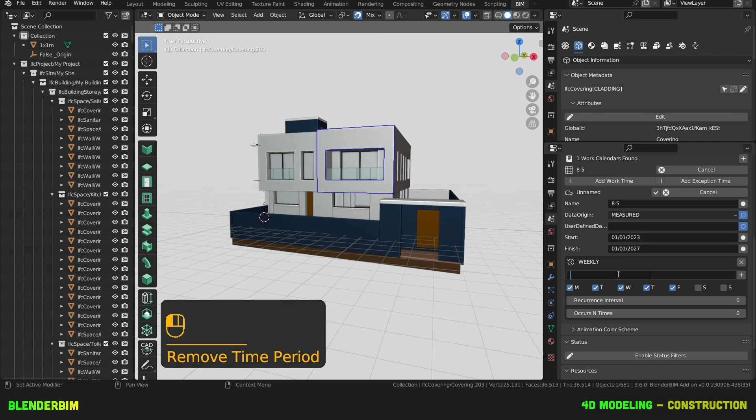And we'll add a weekly time of Monday, Tuesday, Wednesday, Thursday, Friday. And we'll be working from 8 a.m. to 12 p.m. Then from 1 p.m. to 17 p.m. See how you can do it with different formats? Let's apply this. Now I'll add an exception time for our holidays.

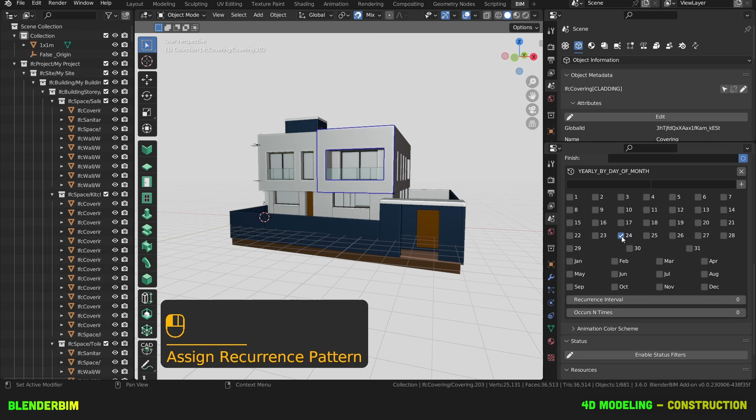So let's add a yearly unspecified date and we'll set it as the Christmas holidays. December. And this exception will run from the 1st of 2023 until the 1st of 2027.

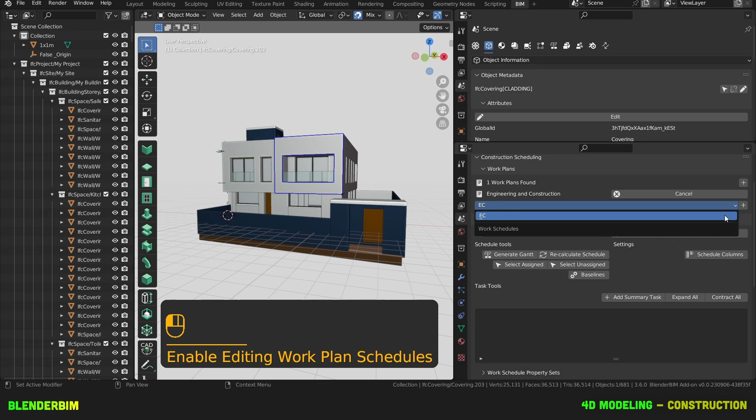Now, we can start adding a few tasks, so we'll click on Enable Editing Tasks. One thing we may also need to do is assign our work schedule to our work plan. We're going to add a summary task, call it Design, Construction, and Procurement. With this task selected, I'll press on Add here to add a subtask. I'll then name it Design.

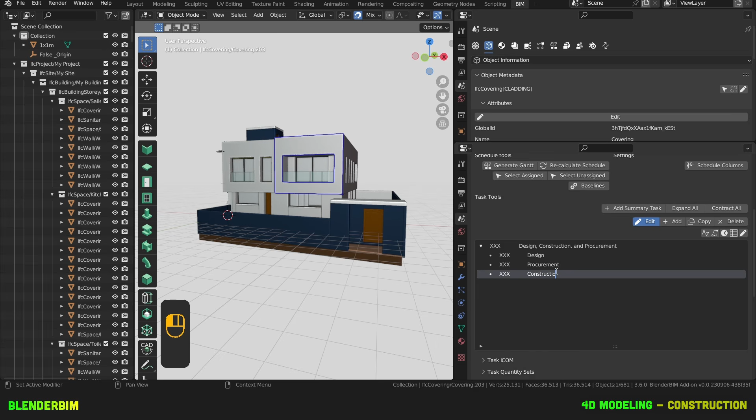I can carry on creating my work breakdown structure in Blender BIM, or just import a file through File, Import, and here you have different formats to choose from. Still with my summary task selected, I'll add tasks, procurement, and then construction. Okay, so I've created a basic work breakdown structure to describe the work packages to build this house.

Now, for each work package, I'd like to split this by building story. And I'm a bit lazy and I don't want to do this for every task, so I'm going to give you a little handy script. What we'll do is either go to the scripting environment or put your mouse in a corner right here, press Shift, and then drag your mouse and it'll create an extra panel.

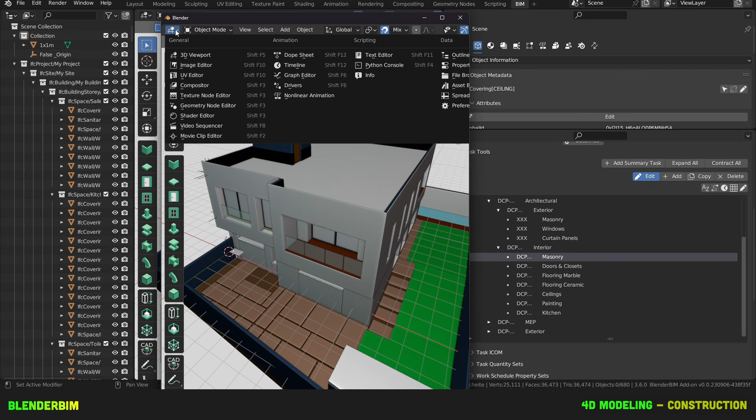Then on the top left, press on this little icon and change it to text editor. Then open the script I'm providing through either open here or just write it from scratch. Okay, so if you press on the pencil here, enable editing task attributes, you're going to get these checkboxes here. And if you select some of these, so let's say I'd like to split this by building stories.

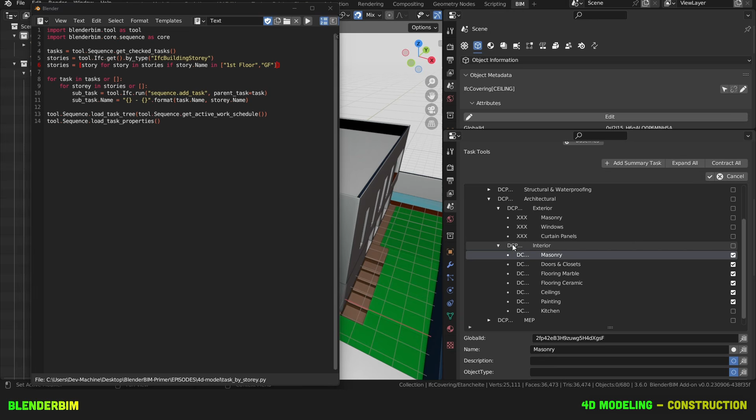What this script will do is it'll get all the checked tasks and then all the building stories, and then we'll filter them such that we can get the first floor and ground floor, and then we'll just split these tasks and we'll also assign them a name. So hit run. The next step is to create sequence relationships.

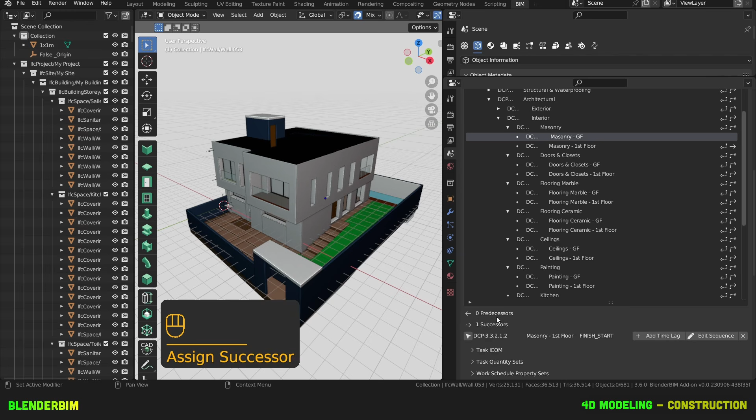For this, we'll press on this operator to enable editing the task sequence. For any active task, you can give it predecessors or successors. So we'll say that the first floor is its successor. Below here, you'll find the list of successors and predecessors. You can jump in between predecessors and successors. So after the first floor masonry, I'd like to do some MEP on the first floor.

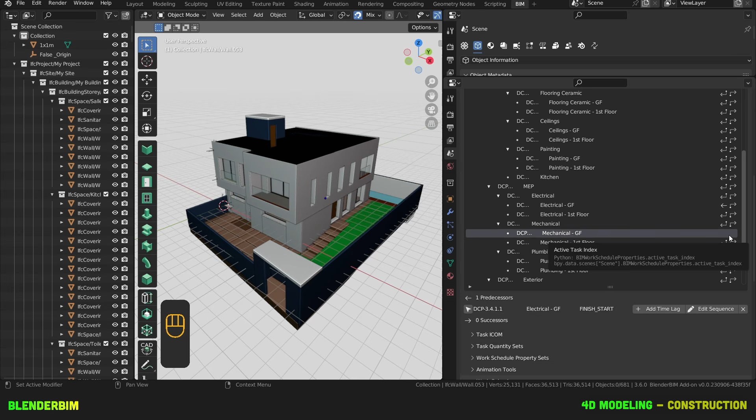And after the ground floor, I'll do my electrical ground floor. Now, once I'm done with electricity, I need to do some mechanical. When I'm doing my mechanical installation, I'd also like to do my plumbing, but this time we'll edit the sequence to be start to start. We'll also add a time lag of 1 day. You can edit the time lag, it can also be negative.

So once you're finished creating the relevant tasks and relationships, the next step is to add durations. For this, we're going to look at the schedule columns operator. We'll enable it and then click on set up default columns. You can also add the columns you wish to by pressing on plus here.

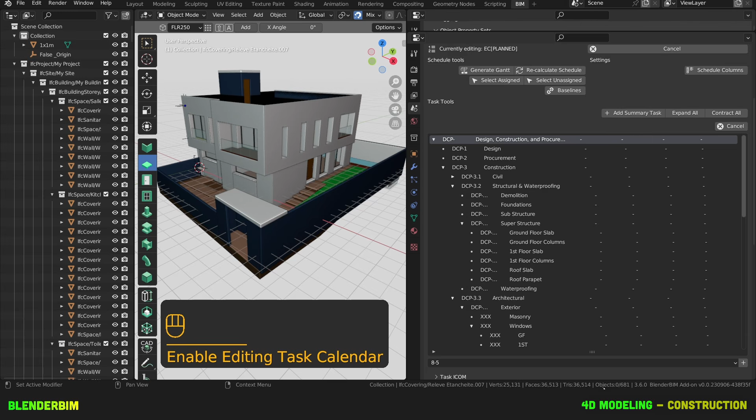And we'll take this opportunity to add a calendar to the first task. We'll press on this enable editing task calendar. And there it pops up. We only have one calendar, so we'll add it. We'll press on cancel and see how the other subtasks have all inherited this calendar.

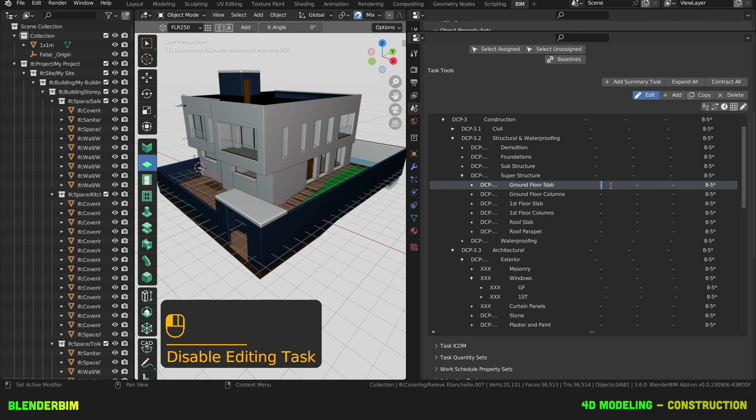Now, we need to look at the task that kicks off our project. I set it as this ground floor slab. It has no predecessors and we'll give it a date of the 2nd of January 2023. Then we'll give it a duration of 5 days. For the other tasks, we can now only give durations.

Keep on adding durations. So I got tired of adding these durations manually. So here's a little script that will add a duration for any task that has either a successor or a predecessor. So after you hit run, all your schedule will be populated.

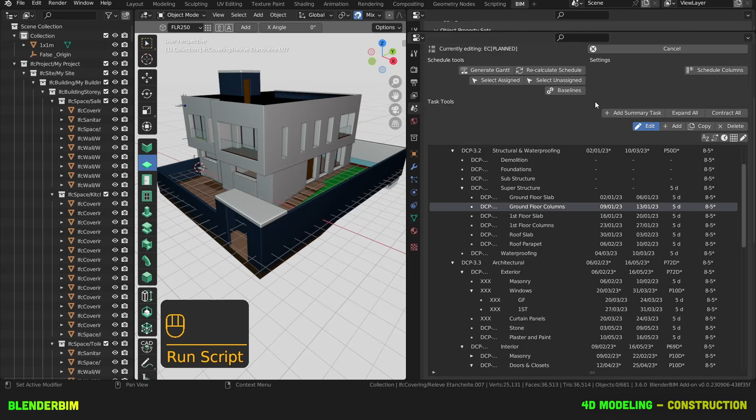Our next step is to assign building objects to our tasks. So for this, I've prepared my view to have two properties panels here. The bottom one will show my tasks and the top one will go to project overview, and under search here, we'll start adding search filters.

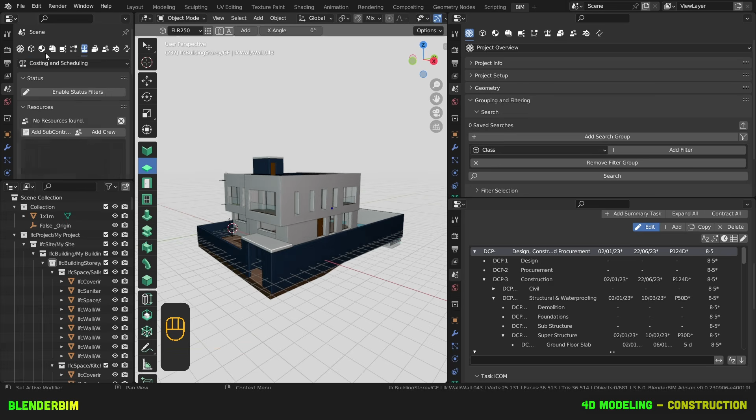We'll also put our mouse on the top left here and click and drag down. Then we'll turn the top one into a properties panel as well. With this top panel here, we'll be looking at object information and materials, etc. So we can easily add filters depending on the objects we have. So I'd like to add these ground floor walls and their masonry.

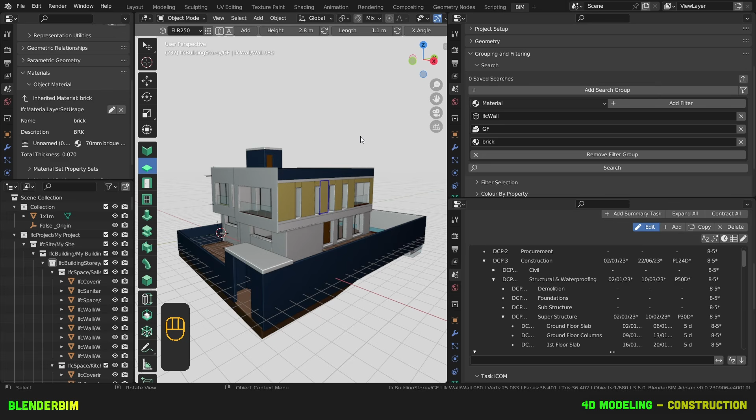So I'm going to add a class filter, and here I'll write IfcWall. I'm also going to add a location filter to only select my ground floor walls. Then I'll add a material filter. I need a material which has the name brick. So the layer set has the name brick, and we'll search for all of this. But first click on empty space, then click on search, and there we go. We have all these walls.

Now I want to assign them to a task. I can either find it here and click on it manually or look for it with this search tool. Here's my masonry ground floor. Make this a tad bit smaller. Then I'll add it as an output because that's what my process will output. I can carry on doing this exercise.

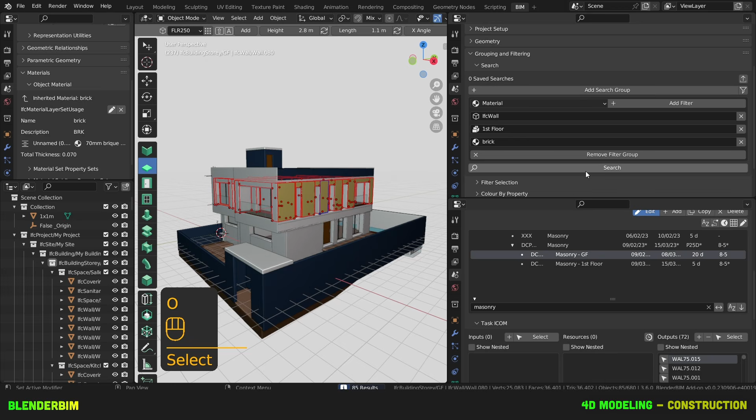Search. Okay. So this model is quite detailed. There is this waterproofing modeled as a covering. So I've added the horizontal waterproofing, and now I can add a second search group. When I hit search, I'm now selecting all of the correct waterproofing. I can then add it to my roof tasks, and there we go.

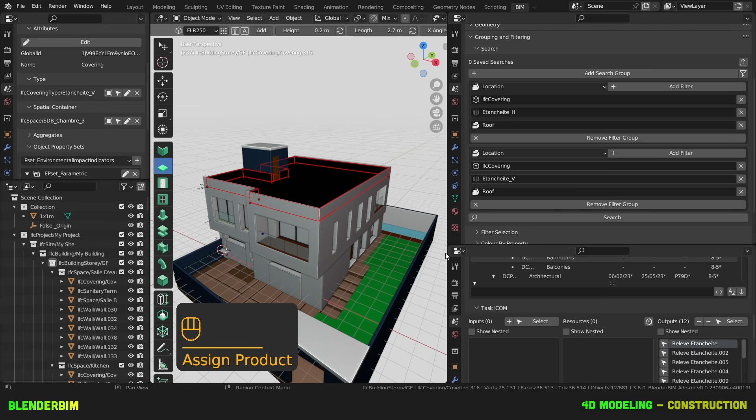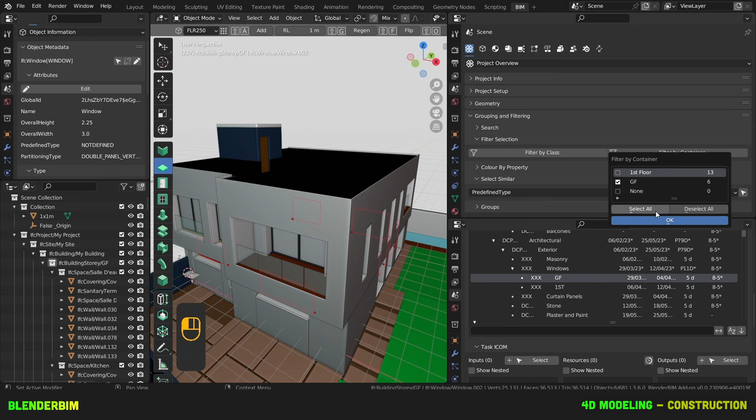So for my windows, I have a window selected, and I have this window activity selected as well for the ground floor. On the object metadata, I'll look for all my windows, and then on this same grouping and filtering panel, there's a filter selection. You can filter by container. And I'm only going to select my ground floor windows. Then I'll assign them. So carry on assigning building objects, and let's now move on to resources.

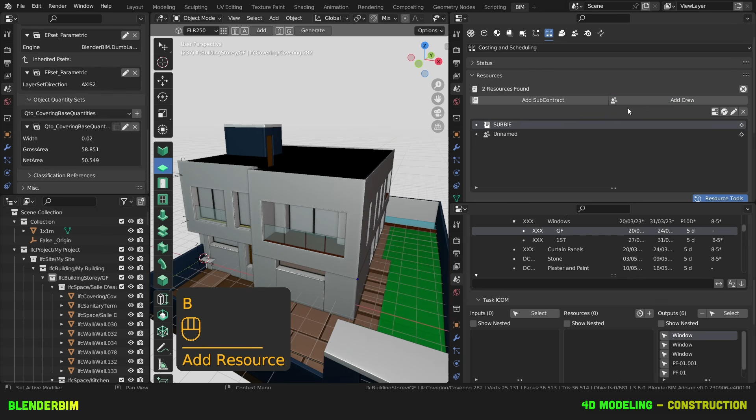Let's turn our top workspace area into costing and scheduling here and toggle the resources panel. Click on the pencil icon to load your resources, and then just add a subcontractor. We'll call this SUBBIE. We'll add a crew. We'll call it masonry. Then maybe I'll add a labor resource here. Call it hollow blocks 100 mil.

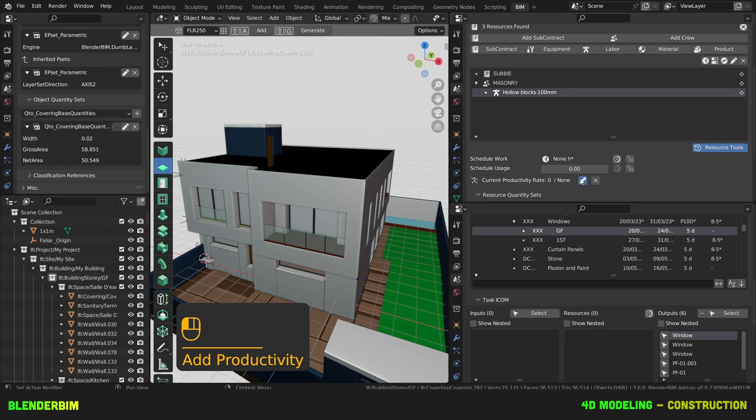For the moment, we'll just stop here and give this a productivity to demonstrate how this works. Then we'll import a CSV with a lot more detail. So let's press on plus to add productivity data and then press on this little pencil. Then you can add, let's say, 1 square meter, and the quantity name we'll need to take off is net side area for my base QTO for my walls. And let's just say it takes us 30 minutes per 1 square meter area.

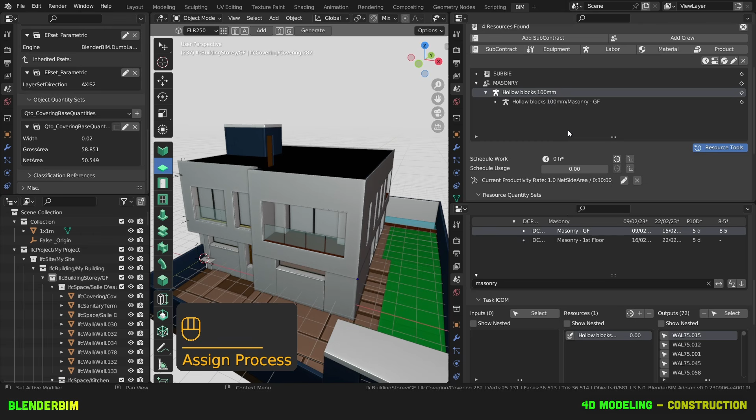Okay. Now, I can look for my masonry ground floor, select my task, and press on plus to add the resource. This will add it on our tree here. And when I select this resource, it tells me it has an inherited productivity rate. I can override it or just keep the parent to make my calculations.

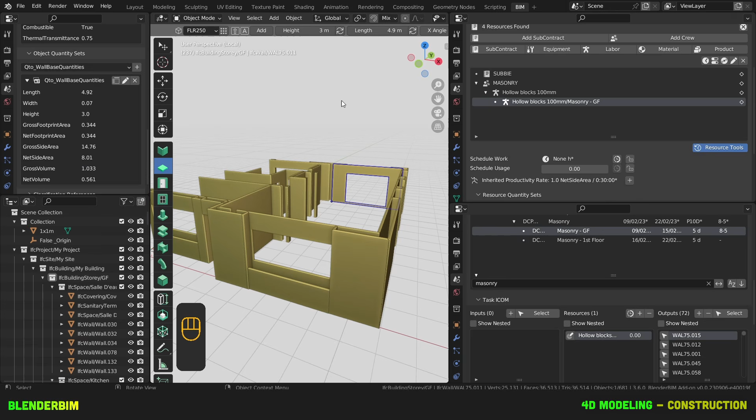And because this task will output all of these products here, and these products have the QTO wall base quantity of net side area, the one I'm taking off, well, I can now press on this calculate resource work, and it's going to tell me the man hours I need to execute this activity.

So let's say I want to constrain this. So I'm going to lock this, and now when I change my schedule usage, let's say to 8 resources, it's going to tell me how long this task is going to take. So let's say I only have 2 masons, it's going to take 7 days. We'll now disable editing the resources and we'll load a CSV. Okay, so here's a little template.

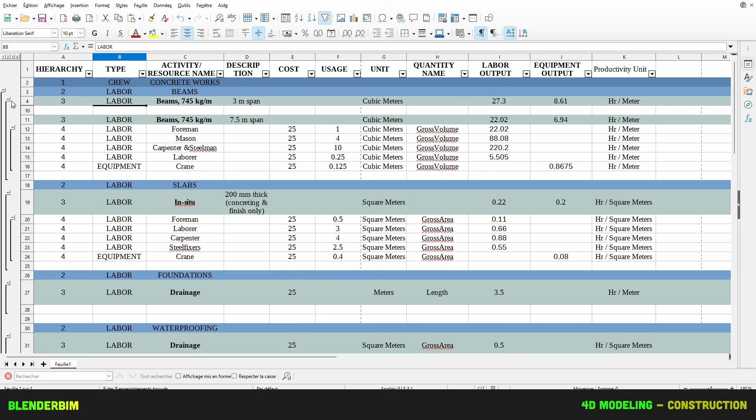I'm providing this under consult-bim.com. You can tweak this to your liking. We're going to look at masonry. So we'll create a crew and a laborer. Underneath it, there'll be a laborer and this team right here.

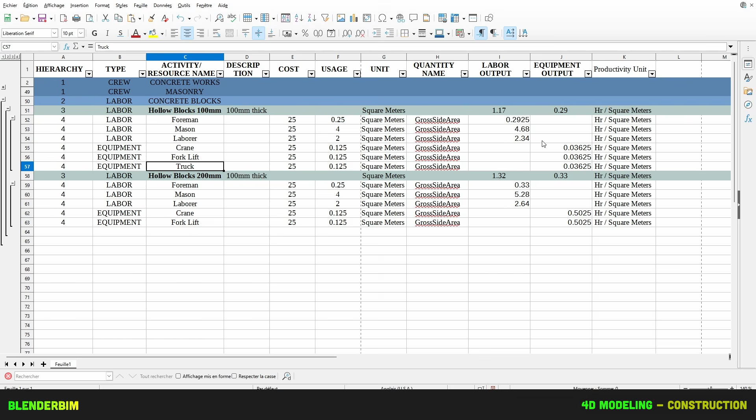So here we have the cost, which is per hour and not per day. With a typical team with this kind of usage, we need 1.17 hours to produce 1 square meter of hollow blocks. And in IFC, we need to take off the gross side area. So if you'd like to change these, you need to make sure it matches the quantity name you need to take off. Make sure to save this as CSV and then click on import resources and load your resource spreadsheet.

So I've deleted the old ones I have, and here I'm just going to look for masonry hollow block. Now I'm going to assign this resource here. So I'll press on plus. So I've assigned all of my resources to this activity. I can do the same for my first floor. So when I have the parent of these 2 resources selected, I can press on calculate resource work.

And so this will tell me the total man hours I need. For the ground floor, I need 85 man hours. And on the first floor, 100 man hours. So after you're done calculating all of your resource work, here's something really nice. When we constrain the resource work, and make sure you do it for all of them. So for all my ground floor, I'm going to lock this.

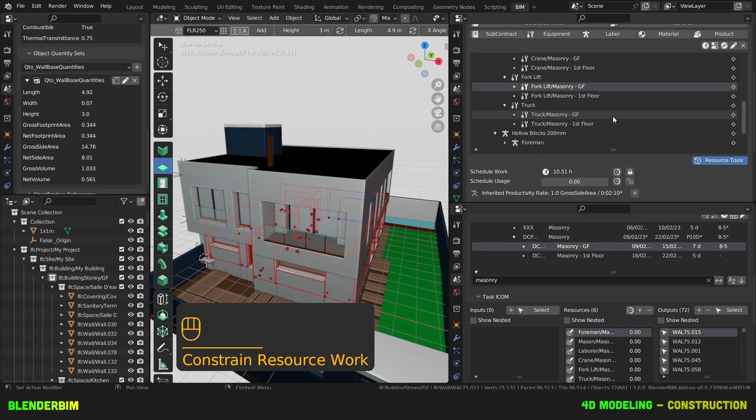So let's see how many resources I need for 7 days first. Okay. So I need a lot of masons, it seems. Quite a few laborers as well. Not so much of crane time. What I'll start doing now is maybe change the duration of my task and see how many resources that requires. So for a 5-day duration, I need 34 masons, 17 laborers.

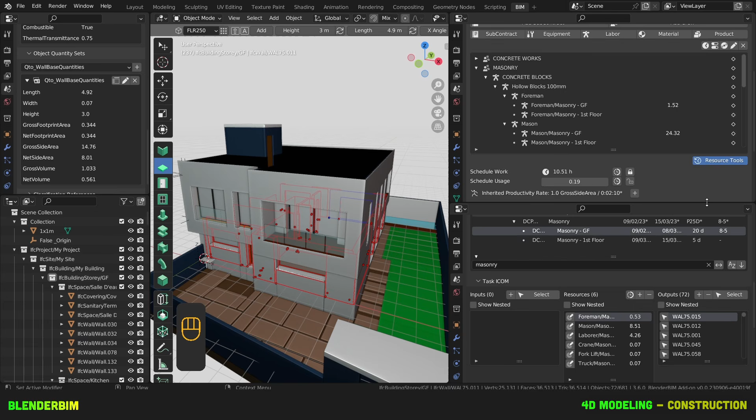Maybe this is too much and our site is going to be quite packed because this is quite small. It's a bit unrealistic, so probably this task should be something like 15 days. And we're starting to get something more reasonable here, perhaps even 20 days. Okay, so here's how we can go into quite some detail and link our resources to our tasks parametrically. And the last parametric link we need to demonstrate is with costing. So before we go into a lot of detail into costing, let's just see how this works.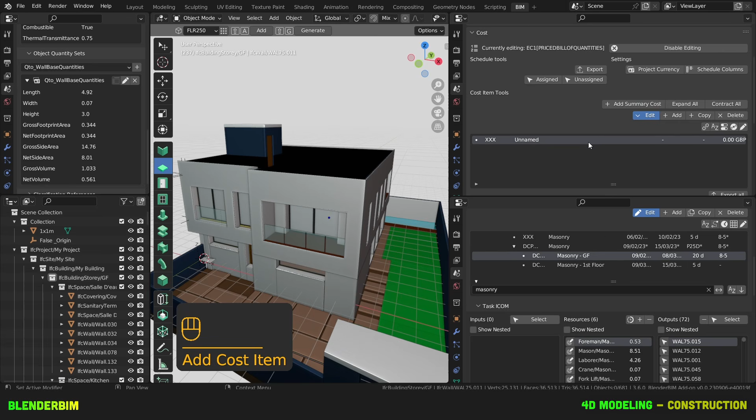So these resources had a cost, as we said. And so we can now go to our cost schedules panel. We'll add a cost schedule. We'll call it EC1, and this needs to be a priced bill of quantities. Then I'll press on this enable editing cost item, and I'll add a summary cost, and I'll just select this for the moment. And with my task selected down here, I can assign the task.

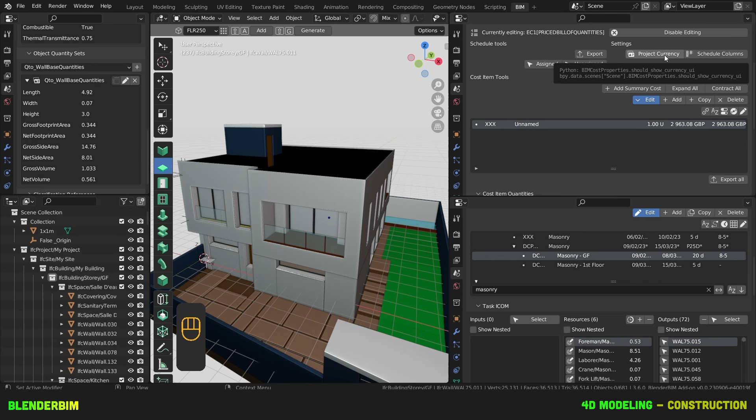And here I have this masonry ground floor activity, which has these resources and it's linked to all these products. So I can now just press on calculate cost item resource, and it tells me this task will require £2,900 because I have a project currency. In the next part, we're going to be delving into how to create construction animations with the schedule that we've created.

Okay, so at this point, it's good to save your IFC project and load it in a fresh Blender session. So far, everything we've done has been in native IFC, so we don't need to actually use the Blender file whilst we were working. But going forward, we may have to save some extra stuff in our Blender file. This may be for temporarily overriding materials, adding Blender context objects, linking Blender files together, etc.

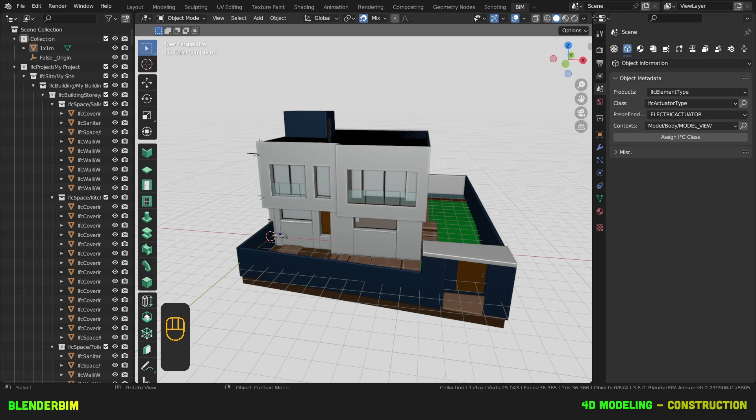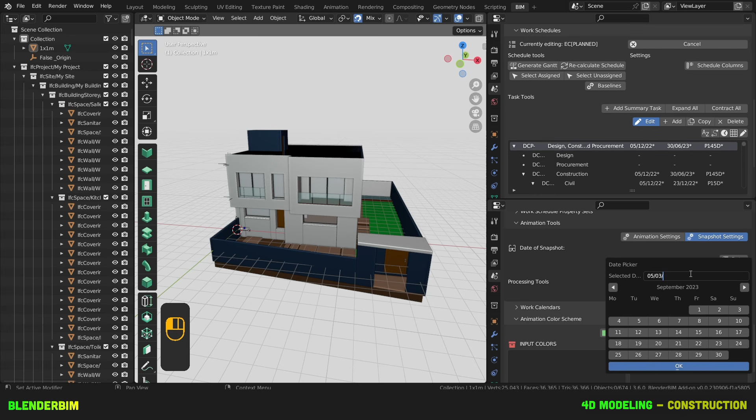Let's tweak our workspace again. We'll put our mouse in this corner here and click and drag. Then we'll go to costing and scheduling on both panels, and we'll enable editing our work schedule, and we'll look at animation tools here. So here with these animation tools, we have the option to look at a snapshot, so at a specific date. So let's say I want to look at something on the 5th of March 2023. I'll click on create snapshot. And this is the situation at that date.

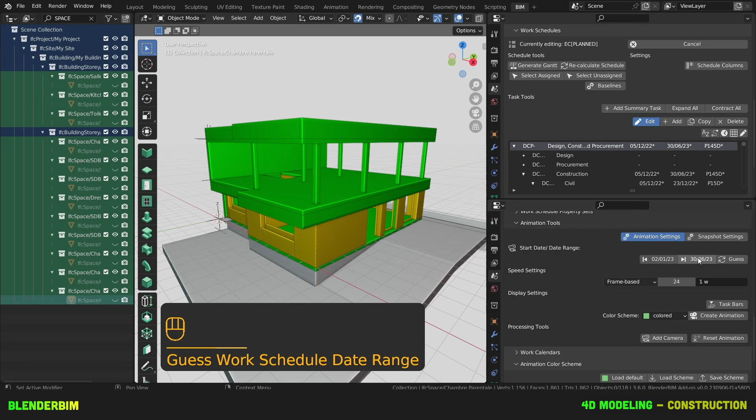Maybe I'd like to hide my spaces. So that's what the 5th of March looks like. And so to create a date range visualization, we're going to set some dates, so a start date and an end date. Pressing on the guess button, we'll look at all your tasks in your schedule, and we'll find tasks which have product assignments, and if they do, we'll try to derive the start and end dates of the visualization.

But you can tweak this to your liking as well to match the start of your project, which here it seems is the 5th of December. So then you can change your speed settings. So let's say we want a duration-based animation where 1 second in this animation represents 1 week in reality.

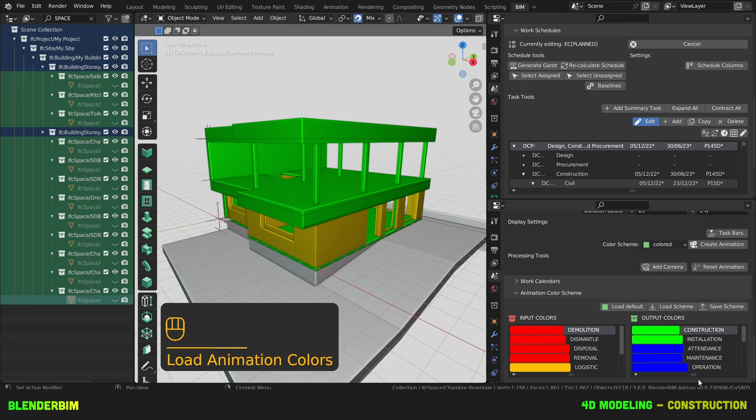So this is a fairly good rhythm, but you can tweak it to your liking. Let's say even 2 seconds. Then we can hit create animation. And if you'd like to tweak the appearance of the animation, you're going to have to load the animation color scheme and change these to your liking.

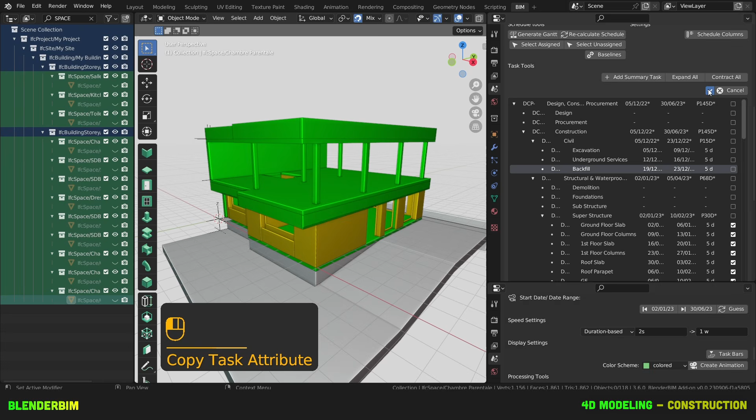So at the moment, all of my tasks are set as not defined, so I can edit the attributes. So for the backfill activity, the predefined type of my task should be construction. And if I'd like to copy this to a couple of other different tasks, I can select the tasks and hit on copy attribute. Then I'll stop editing this. And so for my tasks which have this predefined type as construction, it's going to appear as such.

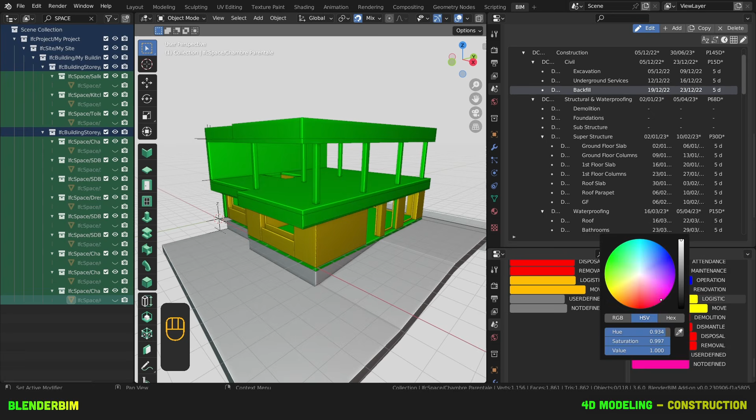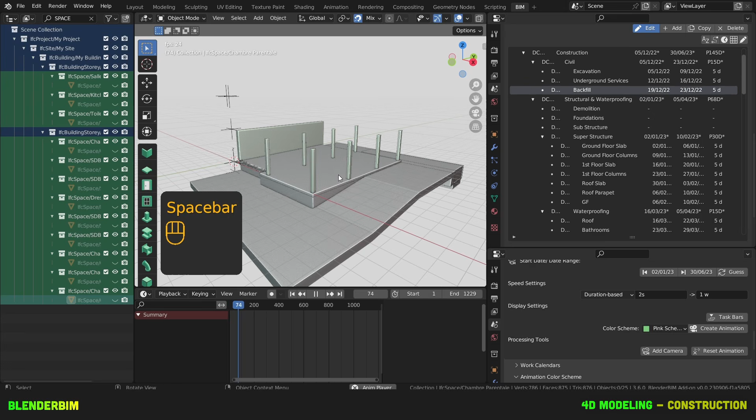And next, put your mouse in this corner, click and drag up. We'll change this to timeline. Now we can press spacebar and our animation will start rolling out. Yeah, my masonry takes a lot of time to be built, huh?

Let's hit pause. We're going to add a camera. Then we'll activate our camera with 0. Now with shift and tilde, we're going to fly and we'll go inside our project. There is a timeline object that has been created, which is basically a date, and we can't see it too well here.

So what we'll do is, with that object selected, we'll go to Object Constraint and we'll copy the rotation of our target, which will be the 4D camera. So it has now copied the rotation, and we'll just position this somewhere down there. And then I'll also select my text and select my camera. Then I'll hit Control P to parent this date to my camera, so whenever I move my camera, the date will move along with it.

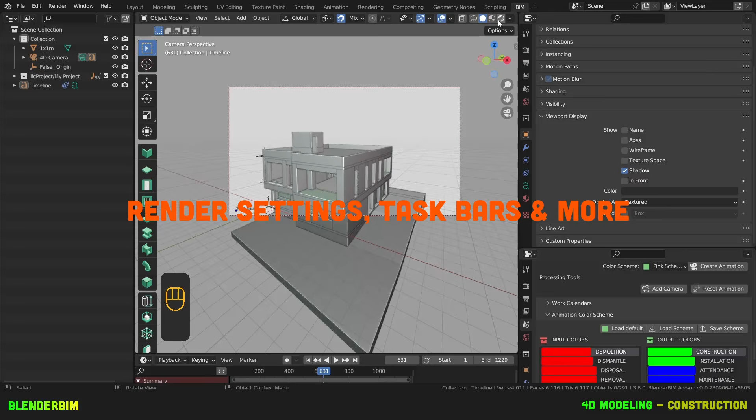I can change the appearance of this object, so timeline. So go to Object Properties, Viewport Display, and change the color to black or whatever you'd like. If you'd like to create a different animation, at the moment I think I have Cycles. I'll go to Render Properties, Cycles, I'll change it to Workbench, and maybe MatCap, Object Color as before, with Backface, Shadows, Cavity, more ridge, and outline being black. Now we can better see our things. Let's remove the grids and whatnot.

This date is too far out from our camera, so it's not too visible, so we'll need to hit G and position it at my camera. Now when I look at this, the date is too big, so I'll select the text and hit S to scale it down. And oops, now without any of my snaps, I'll move it right there.

Let's look at where it's positioned. It's not too far from my camera, but I could probably make it closer. There it is. Now I'll move it there, scale, and I think this is quite reasonable. Whenever I move my camera, it shouldn't be hidden by anything else. Okay, so that's for our date.

So what if we'd like to add some taskbars? And this can get quite crowded, so there may be different ways that you need to set up your workspace. So let's split this in two. And we're not going to look at our camera here. What we'll do is we'll click on taskbars and enable selection. And back here, we'll select the task we'd like to show a taskbar for.

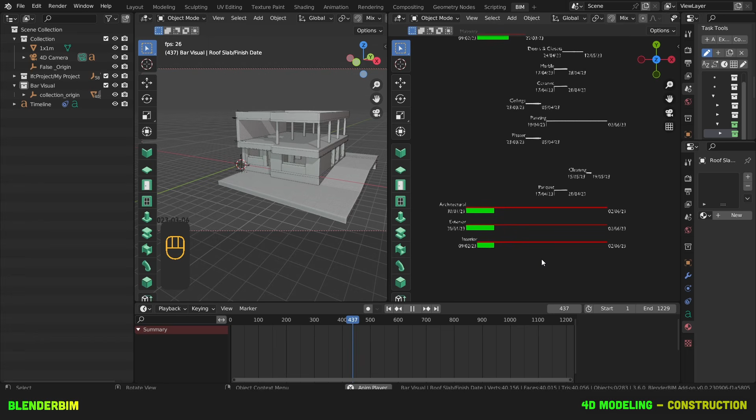And when we hit play, maybe you can have a camera that moves on top here and it travels across these dates, and you can create a nice montage. On the left hand side here, we're on workbench mode, and maybe we want to look at our object materials. So we'll change this to texture or material.

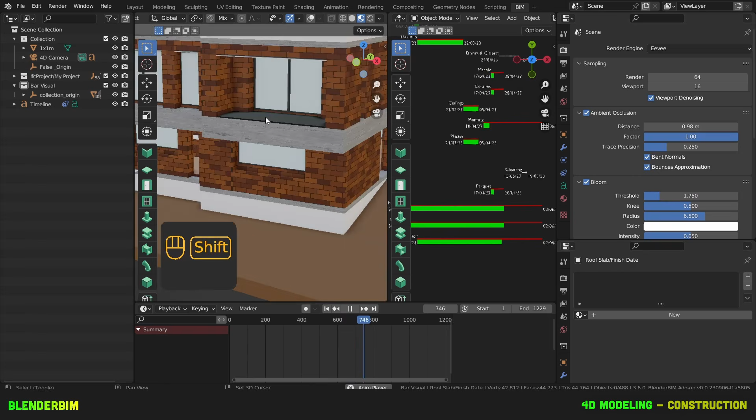You can also look at it through Eevee, which is also pretty fast. Change your scene lights and scene world. We can also add some ambient occlusion, some bloom. So play around with these options. You can also check more tutorials on Blender and have fun.